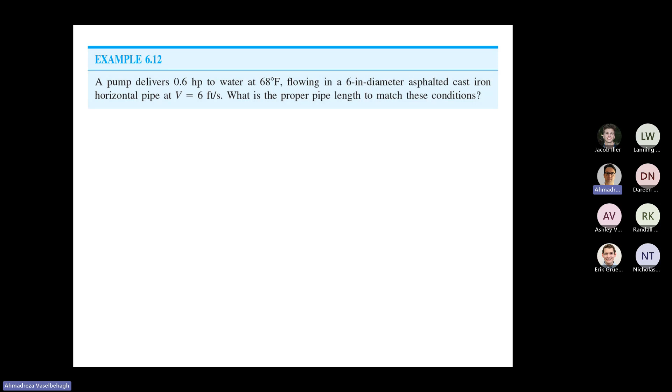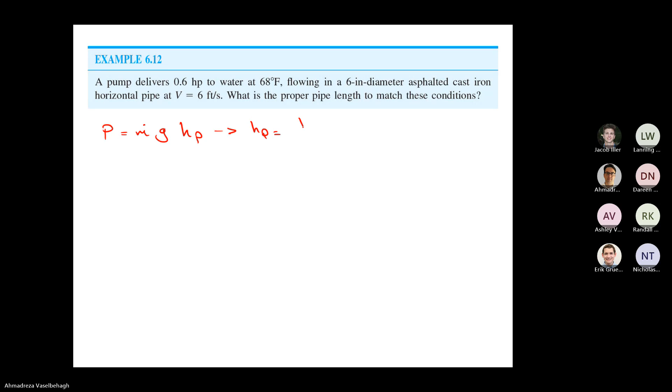So, okay, the first thing I'm going to do, I'm going to write down power P is equal to M dot G and then head of the pump. So from here, we know that head of the pump is going to be power, which is given to us, divided by M dot G. What is M dot? M dot is rho VA, right? So rho VA, and then multiplied by G.

So I'm going to plug in all the values that we have. Head of the pump would be 0.6 horsepower, but then we need to convert this horsepower to foot pound force divided by second. So every horsepower is equal to 550 pound force times foot divided by second.

You know, Newton meter is joules, right? Force times displacement is work. So now instead of Newton, you have pound force, and instead of meter, you have foot. So that's joules. Joules divided by second is watt. So that's why pound force times foot over second is basically power. Okay. So every 550 pound force foot per second is equal to 1 horsepower.

So if I multiply 0.6 horsepower by that 550, then I've basically converted my power to pound force foot over second. So that's the power, and the whole power is divided by rho VA times G. Okay, so rho times G is equal to gamma, right? So then instead of VAG, we could basically say V area gamma.

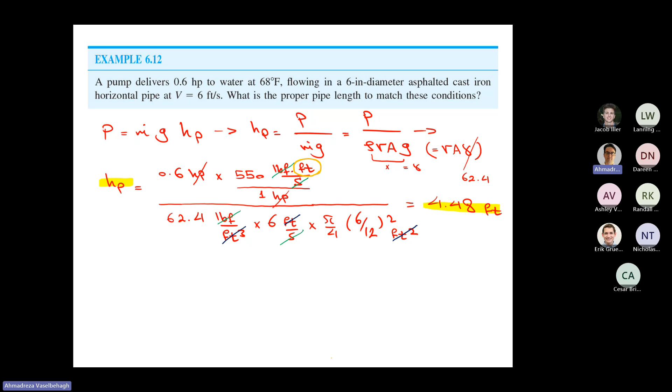So sure. The other thing is the elevation. If the pipe was going up or going down at a certain slope, right, then we needed to have that delta Z. Well, in this case, it's horizontal, so we don't have to worry about that.

So we say HF, basically losses, is going to be equal to head of the pump, which is 4.48, and that is equal to F L over D, V squared over 2G. Okay, and let's not forget you're looking for L. The problem wants us to find the length.

So in this thing, we know what D is. It's 6 inches, we convert that, it's 0.5. We know what G is, in British units, 32.17. We know what velocity is, that is 6. The only two things that we don't know there, one is F, the other one is L. But we know how to find F. So let's go after finding F first, and then we will plug everything in here and find L. So I'm going to go to the next slide and find F there.

So how do we do that? We need to have the Reynolds number, right? So Reynolds number is equal to rho V D over viscosity, right? So now what is that?

Well, or we can write it as VD over viscosity, dynamic viscosity over rho. So you see the rho is always there. It can get combined into mu, right? And that is nu, or kinematic viscosity. So you can go as VD over nu. V, we know what that is. That is 6. D is 0.5 after converting that 6 inches to foot.

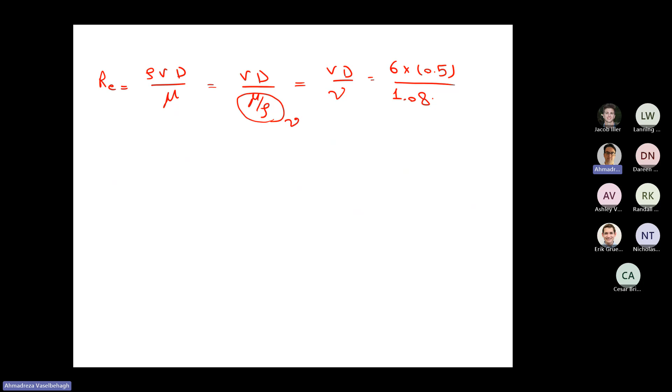And then we have nu of water. Again, all these properties will be given to you either in a table or directly in the problem statement. Obviously, I don't expect you to memorize these. So now let's look at the units. If you look at the units, on the top we have velocity 6, that is foot per second, right? That 0.5 is also foot.

And what's the unit of kinematic viscosity? That's either meters squared per second or foot squared per second. So that is foot squared per second. It's always a good practice to keep track of units so you know you're not messing up anywhere. So you can tell that it's foot squared per second on the top, foot squared per second on the bottom. So this is unitless. And the value, if you calculate that, is 278,500. And obviously it is unitless. So that's your Reynolds number.

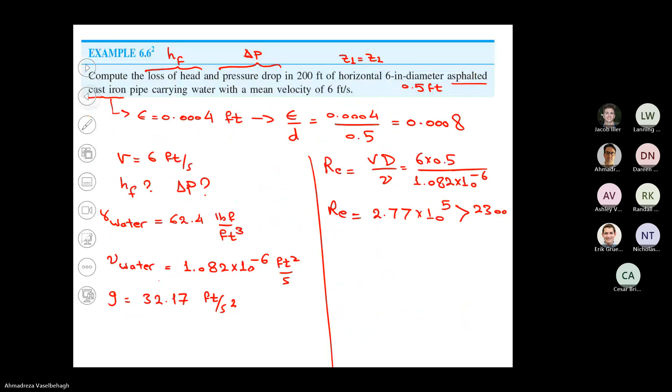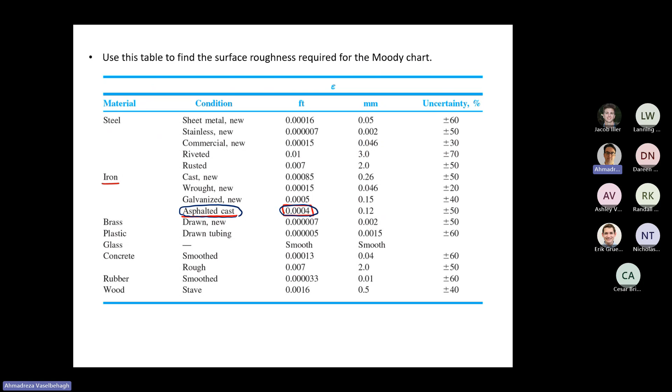And then you can also find your epsilon over D. Well, how do we find epsilon over D? We know what material is used to build this pipe. We go to the table and we read the value of epsilon. So what's the material? It's cast iron asphalt. Let's go back to that table that I provided to you. So it's this, right? The same thing that we had in the other problem. Since we are going with foot, it's 0.0004, and that is in foot, obviously.

So what is D? A common mistake, when you're working on this problem in the heat of the moment, you just forget converting these units. You can easily go ahead and divide that by 6, and then you end up with a completely different value when you go to the Moody chart to read the value of F. So you have to be very careful. You don't divide this by 6, you divide that by 0.5 in foot because 6 is in inches and needs to be converted. So it's 0.0008 then, right? And that is unitless.

So using epsilon over D and Reynolds number, we go to the Moody diagram, and then from there we read the value of F. I'm going to practice that now and see what F we can read there. 278,500. And you know you're not going to be able to spot 278,500 precisely on that diagram because of the resolution that it has. And epsilon over D is 0.0008.

Let's go and find that diagram. Yeah, here. 0.0008 is this. It's good to actually have an epsilon over D that has a line there. Otherwise, you have to read between the lines. So that's your 0.0008 line. Let me mark that so I'm not going to lose this line. Now, what is my Reynolds number? It was

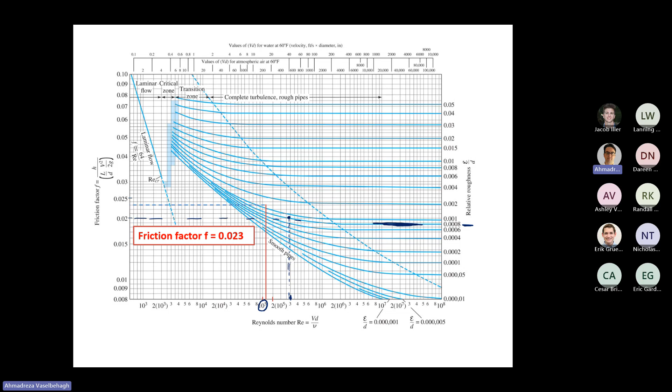So this line over here, let's just see what that is. It's this line. So this is kind of like 0.02. So I'm going to go with F equals 0.02.

0.02. And now I'm going to go back to the previous slide and plug everything in there and find the value of L, which was the length of the pipe. I brought this problem to you because one of you asked me, is it always like that we are after HF? So this is an example that you're not really after HF. You do the very same thing, but you're finding another variable in your equation.

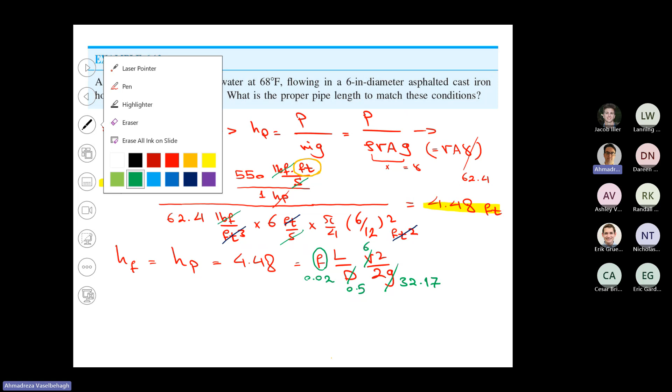So this is 0.02. D is going to be 0.5. G is going to be 32.17. V is 6. Let me redo that. And then from here, you can go ahead and find the value of L. So the value of L is going to be roughly, let me see. So I would say then L is 4.48 times 0.5 times 32.17 divided by 0.02.

And then, oh, and there's a 2 there. Sorry, I forgot 2 before. It's 2G. So there's a 2 before that 32.17. So it's times 2 times 32.17 divided by F, which is 0.02, and then 6 squared. So from here, you can find the value of L. Does that make sense, what I did here?

You know how this can be very complicated, and I'm not going to give you a problem like that because you won't have time to deal with it. It can be very complicated if D is unknown. I could have given you the value of L. I can give you the very same problem, let's say we don't change anything here. So this is going to be roughly 203 foot. That's the length.

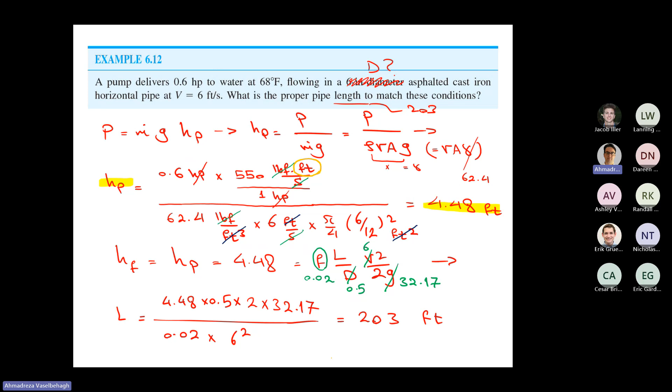Let's say I give you the length. I take D out. And again, I'm not going to give you that. I'm like, what is D? And I tell you that the length is 203 in the problem statement. Now you're in trouble. You know why? Because you can't even find Reynolds number. You don't have D. You see how changing one thing can make this very difficult for you. Not only you don't know what Reynolds number is, you don't even know what epsilon over D is because you don't have D. So you can't use Moody chart.

You see, I'm bringing it up to your attention. I'm not giving you a problem like that. We ran out of time, right? But in an ordinary semester, I would actually give you examples. We would work those examples in the class. You know what you have to do there? How you deal with a problem like that? You guess a solution, you guess a value for F, for example. You guess a value for D. You go through it, and then you have to reiterate.

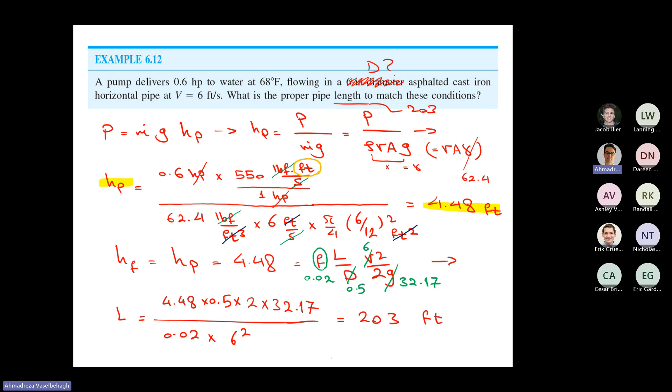It's kind of like, remember that technique that we have in math? If we are solving an equation for X, for example, and we don't know how, you keep one X on one side, you move everything else to the right side, and then you guess a value for X. You put that on the right side and you solve it, and then you get a new value for X. And then you put that new value for X in there. So you have to do something like that if you ever encounter a problem like that.

So for example, let's say I ask you to solve this: X raised to 5 minus 4X squared plus X minus 3 equal to 0. So how are you going to find that? Do you have a way of solving that other than drawing? Let's say you can't plot that. If you don't have any of those things, what would you do? You keep that X on the left side, you move everything to the right, and you end up getting this, right?

And now guess a value for X. X would be 2, for example. And then I'm going to calculate X accordingly, with 2 raised to 5 and so on plus 3, and find a new value for X. And then plug whatever you find there back in here again, find a new value, and go over and over until it converges. Sometimes it does not converge. It actually starts diverging. And then you have to go back to your equation and find another way to define X.

So for example, what you do is you say 4X squared is going to be equal to X raised... I'm going to take a question, Eric, in a second. So 4X squared, and then you keep the other things, X raised to the 5 plus X minus 3, divide both sides by 4, and then take a square root. You see, that's another way of defining it. Then try this. Do the same thing. That's the iterative technique. If D was unknown, you would have to follow this logic. You would have to guess a value for F, go over that loop until it converges.

The reason that I'm sharing this with you is that there is a good chance that you will have to deal with a problem like that if you decide to go into, let's say, HVAC or the business of designing pipe systems. So that's how you deal with it. Okay. Anyway, I'm not going to give you a problem like that. You don't have to worry about this for Thursday. Okay. So with that, Eric, please go ahead and ask your question.

So you were referring specifically to guess and check? I'm referring specifically to what? To guess and check, like, if D is missing, we have to guess and check or something? Yeah, you have to guess your solution, and then you go with whatever you guessed, you find D, and then you calculate Reynolds number with that D. Now you find the value of F. Does that make sense? And you keep repeating this until it converges.

But again, this will not be covered in the exam. I just want to bring it up and tell you that it could be complicated if D was unknown. Okay, you don't have to worry about that this Thursday. So with that, let me ask you this. Any questions about this problem that we worked on and found L?

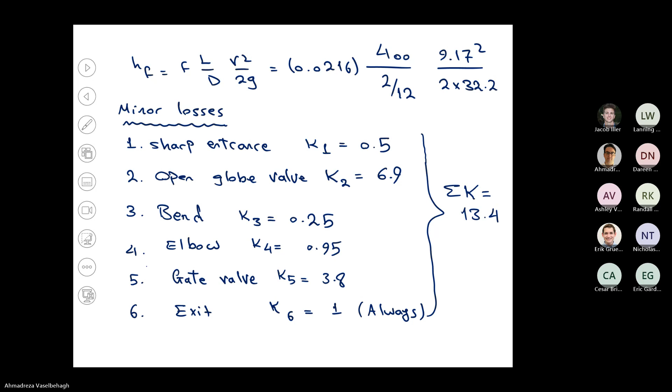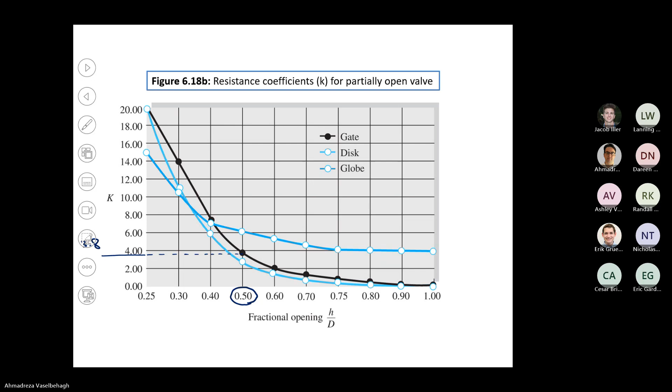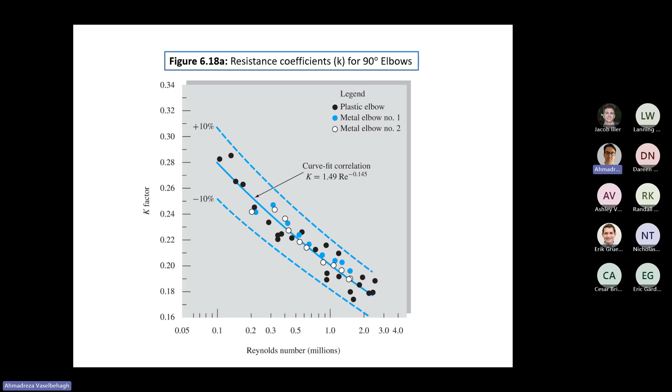That kind of applies as well. So the tables that are supplied to us, there's kind of two for the 90-degree elbow, and one seems like a regression, like a calibrated curve. You're talking about these things, right? There's another one. That one compared to taking the 90-degree elbow from the table, where it tells you the diameter of the pipes. So which one would you use in each situation?

You know what? I would use the table as much as I can, unless you're dealing with a case where, for example, the diameter that you have for a screw is up to 4 inches in the table, and the flange is up to 20 inches, so you have more data for the flange. But let's say it's the screw, and the diameter that you have is 8 inches. Then you can't use this. Then go to that graph. You know what I mean? So use the table as much as you can.

Now that we are at this, let me tell you something else that happened in the homework problem that you're submitting tonight. The elbow was connected to a pipe that has a D of 3 inches, and 3 inches is not even in this table. So you can do two things when you deal with a problem like that. The very first thing you can do is interpolate, and I hope that's what you did. In this case, since 3 is right in the middle of 2 and 4, interpolation is easy, basically averaging your values.

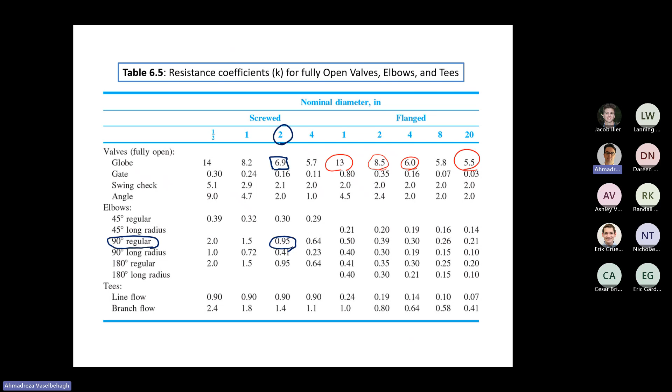Okay. So with that, let's go and look at the first problem that I gave you in that sample exam. One thing about the sample exam that someone brought up this morning was, will the exam cover only the stuff that we have in this sample exam? Well, obviously the answer is no. This is just a sample exam to tell you how complex the exam is going to be, right? And also to show you that it's not going to be anything outside the...

How can I get rid of this thing? Okay. I think now if I go back to this mode, hopefully you won't have it there. Okay. So back again. This? Oh, this thing over there. See? Oh, yes. Thank you. Thank you. Oh, and it actually disappears too.

So it says, write the general form of the continuity equation, and then simplify under the given conditions. It says incompressible in this case. Well, what is the continuity equation? This is a problem from chapter 4, section 4. You always write the general form when they ask you to write the general form. And then when you're simplifying, simplify only for those given conditions. Don't write steady and then simplify for steady.

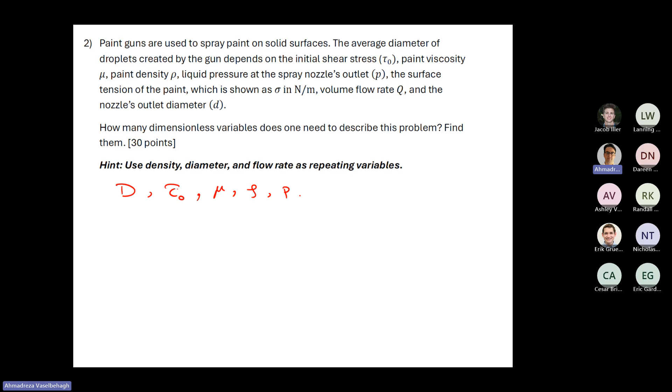And then the surface tension of the paint, which is shown as sigma, in Newton per meter. That's surface tension, right? And then volume flow rate, Q, and the nozzle's outlet diameter, which I'm showing by lowercase d. How many dimensionless variables do we need to describe this? How many dimensionless variables do we need? Is it 7?

I'm counting 8. It's 8 minus 3, 5. Okay, because it says the droplet's diameter is that capital D. And then the last D is the outlet diameter of the nozzle's outlet. Does that make sense? So you have 2 different diameters here. So it says the droplet's diameter depends on these things. So you have to count that first thing, which is the droplet's diameter. Does that make sense? So you have 8 things here. So it goes 1, 2, 3, 4, 5, 6, 7, 8.

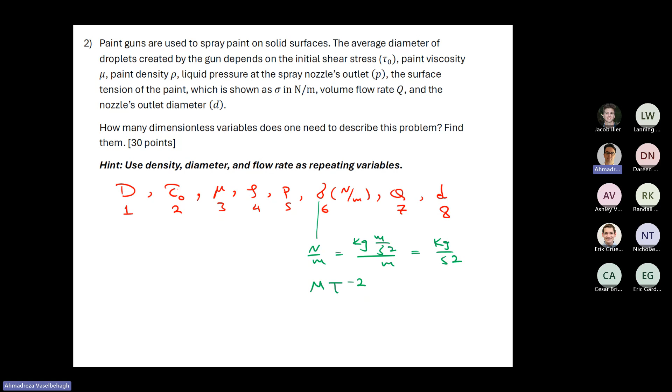Okay. So which of these variables is surface tension? Is that sigma? Yeah. Let me answer your first question first. It says the surface tension, I'm just highlighting the problem statement, which is shown as sigma in Newton per meter. Does that make sense? So sigma in Newton per meter is surface tension. Okay, what was your next question?

Which kind of variables did you say would not be ones that you should use for repeating variables? Yeah. So what I said was, if you choose this diameter and then this diameter, and then choose, for example, density as your repeating variables, it's not going to work. The reason is you don't have time in each of these three. Therefore, when you're grouping these three with any other variable, you don't have time to cancel out time that appears in every other variable.

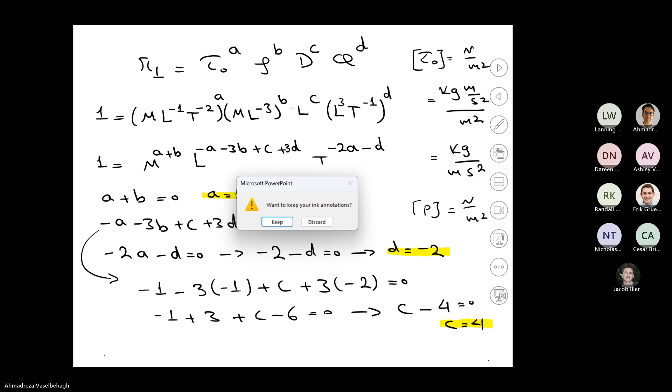Yeah, you know what? Let me just leave the... I don't know how this happened. Where did that come from? This interacting, annotate. How can I just get? Okay, I think it's gone now. Yeah. So let me go back to presentation mode. And okay, so

Now I can write down what I have for pi 1. So pi 1 then is tau raised to a, which is going to be tau naught, rho raised to b, b is -1, and then we have d raised to c, which is d to the 4, this whole thing divided by rho... no, this is good. And then rho, and then we have q raised to d, and d is -2, so it's rho q squared. You see, that is what we guessed by doing what we did early on, and that's exactly what you found.

So now, you said we could actually, now you're after p, the dimensionless variable for pressure. You don't have to repeat all of this. The only thing that you need to do is substitute that tau naught with pressure, and then you have pressure times d raised to 4 over rho q squared. You don't have to repeat that whole thing. So you already have quickly your pi 2. Why do you do that? Because the unit of tau naught is the same as the unit of p.

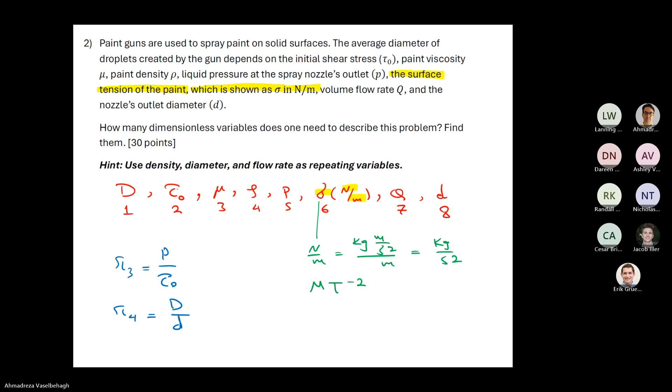Yeah, makes sense. If there's a little d given, we pretty much always assume there's a large D too? Because initially I missed that. Okay, and another question: are you going to give us the repeating variables in the exam because of the amount of time that we have? Or unless it's very similar to one of the problems that we've done before. For example, we worked on a pump problem within the lectures, right?

And in that problem, I told you that go with rho and go with omega, rotational velocity, and also go with a diameter, right? So you already worked that problem. You've already seen that problem. And it was the same variables when we worked on the homework assignment, right? It was again rho, RPM, which is the same as rotational velocity, and then diameter. You know what I'm saying?

If it's something like this, a new problem that you have not worked on before, yes, I'm going to tell you what those repeating variables are. Okay, yes. Have you decided yet if this type of question is going to come with just finding pi, or is it also going to come with applying numbers to it, like what we did with the cylinder in class?

I have not decided that. I haven't written the exam yet. I did not want to do that because then I can't help myself but give you hints about what the problems are going to be. So I don't want to write the exam before this. But I haven't decided that. But look, there are a limited number and type of problems that we've worked.

Oh, and another thing that I told whoever stopped by the office hour today, I know I'm repeating myself, but I think it's important. It's worth repeating. Do not read through the solutions and then assume that you know how to do it. Do it. Because if you read through the solutions, it makes sense to you. You might think that you know how to do it,

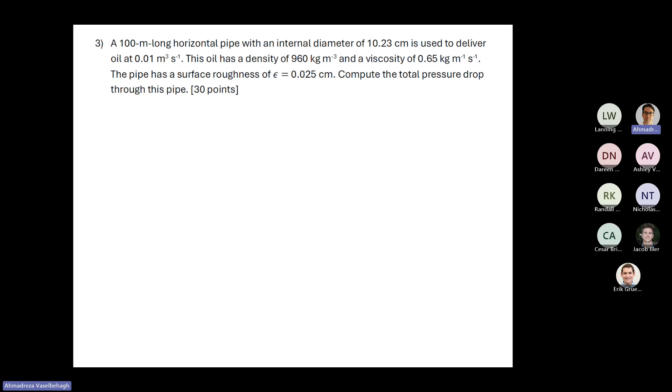Go over those problems one more time. Don't try to expand that data set on your own. Instead of working more problems, work the problems that you have a few more times, if you are thinking about the best way to prepare for this. Okay. So now, let me look at the last problem. The last problem said use the Navier-Stokes equation to formulate flow velocity for Couette flow in the presence of a pressure gradient in the flow direction. Yes.

Eric, do you have a question for me? So what you were suggesting is that students do the actual problem first and then look at the solutions to see where they made mistakes, because if they just read it... It's okay if you read it once, but don't stop there. Do it after you read it. You know what I mean? Do it without looking at my solutions, and make sure you can do it on your own.

Okay. So let me explain problem 4. Problem 4 is directly from the lecture notes, Couette flow. Remember, have I defined Couette flow? It's the last problem that we worked on in section 4. Couette flow is the problem where you have a fixed surface, then some fluid, and then a plate on top of this fluid, and you move that plate with velocity v. That's what Couette flow was.

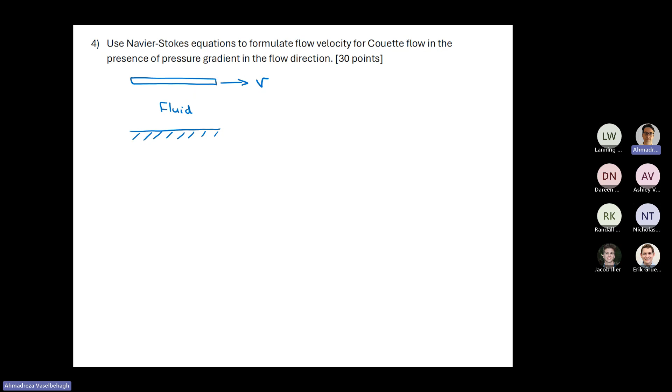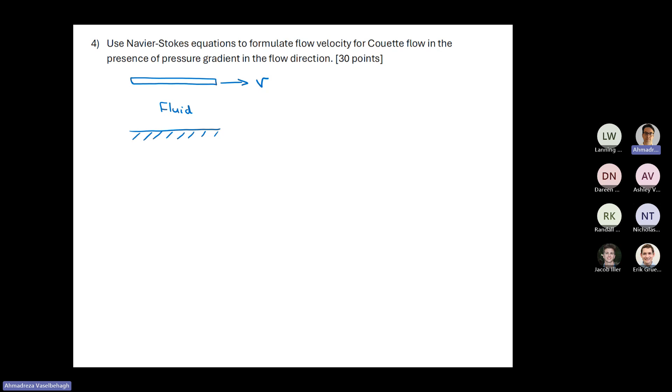Now, when we solve for Couette flow, we solve assuming that we have a pressure gradient or we don't have a pressure gradient. In this problem, it says solve for Couette flow in the presence of a pressure gradient. So this is a problem directly from the lecture notes. So I'm going to go to that problem in the lecture notes and show it to you there, in the interest of time and to make things a little bit easier for us.

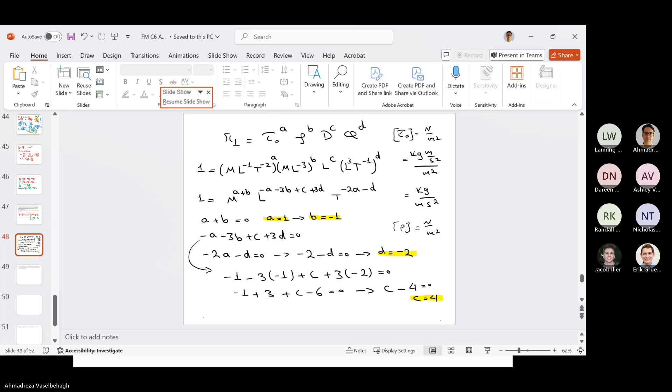This way I can use time a bit more efficiently. So let me go there. Okay, so section 4.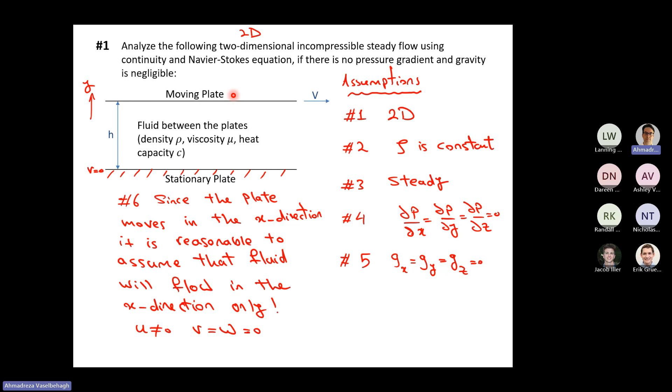And then we plugged in the two boundary conditions that we have. What were the boundary conditions? Velocity at the bottom wall is 0 because it's stationary. Velocity at the top wall is equal to the velocity of the wall. You plug them in there and you find the two. So that's without pressure gradient. And then when I did it with pressure gradient, I kept that term there. Okay, and then when you were integrating, it just ended up being a second degree polynomial instead of a first degree polynomial.

Okay, so this example is important. The reason that I included that in this sample exam was to encourage you to go back and make sure that you read that example and you know how to deal with it. That's the only flow problem that I covered that was solved directly from the Navier-Stokes equation. I give you only one problem, and that's this. So I expect you to know how to work this problem.

So that's problem 4. Any questions about this Couette flow? Look online. Is there anything there that you would like me to explain about this Couette flow? Yes, sir. Specific types of flow cases we would need to know for the exam, like this? Is there a specific name for when both plates are moving or anything like that, or no?

Yes, we can have a problem like that. I won't cover it. But I want you to know everything about this Couette flow. For example, if I ask you to write down the simplifying assumptions that would lead to this solution. If I want to ask a question that's quicker about it, I don't want you to do everything from scratch. I want you to write down the assumptions. Or if I ask you, why can I make this assumption?

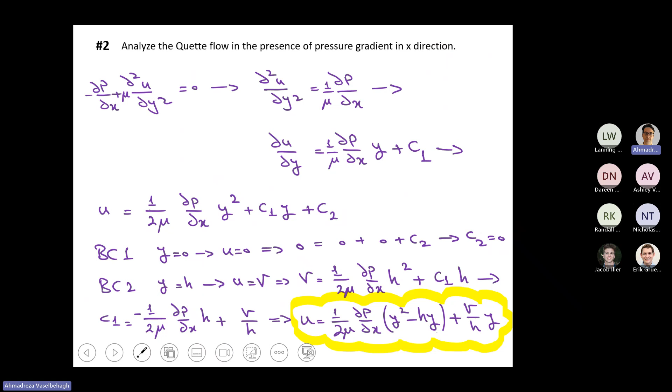In this flow, I'm going to give you this problem statement, for example, and ask you why am I allowed to assume that the second derivative of u with x and the second derivative of u with z are 0? Explain that. See, I want you to be prepared. Then how would you explain that?

You're like, well, because velocity changes only when we move in the y direction, because when I move in the y direction, I get closer to the wall, or my distance from the wall changes. If you move in the x, your distance with the wall doesn't change. The wall is what's slowing the flow down, right? If you're at the same distance from the wall and you're just moving parallel to the wall, your speed is not going to change.

Look at this floor. You can move parallel to the floor in this direction, that's x, or in this direction, that's your z. So you are still at the same distance from the wall. But the moment that you start moving up or down, or you're moving in the y direction, that's when you start having velocity gradient. Okay, so I want you to know this case very well.

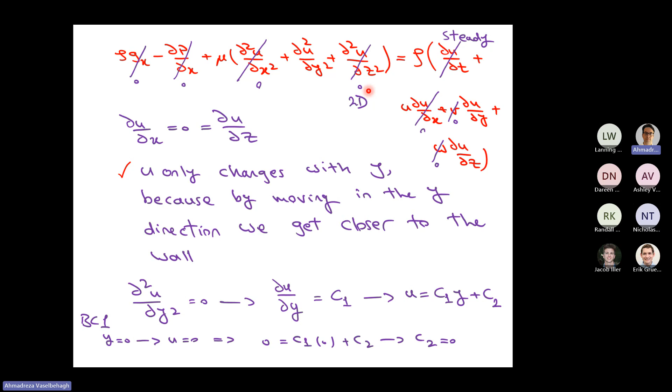Again, in an ordinary semester where we don't lose, how many sessions did we lose? 4 sessions, right? I used to give the example of having 2 cylinders, one inside another, the outer cylinder stationary, the inner cylinder rotating. And then ask you to find the velocity of the flow, because the rotating cylinder would make all the air between the 2 cylinders rotate. And I used to work that in my lecture.

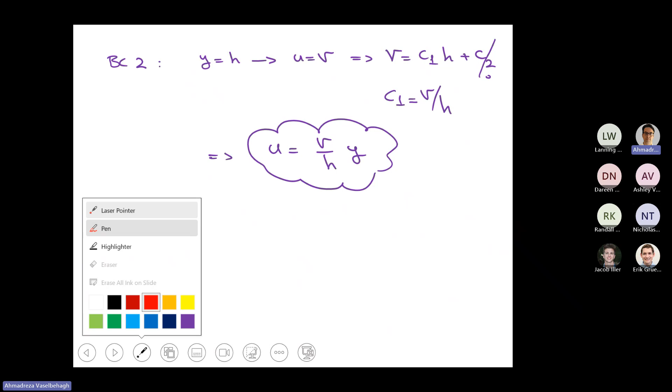I used to work this problem in the lectures. This semester, we skipped it. Again, it's just going to be about this Couette flow. I expect you to know it. So whatever questions I ask about it, you should be able to answer. Yes.

Like the polar version of this equation. Yeah. Because I was thinking, I can't really do that in Cartesian. No, well, it has to be cylindrical or polar. Yeah, which we didn't get into the details of. So the good thing was that everything was covered. We managed to cover everything that you needed to know.

Sometimes I could not cover more complex problems of those concepts. That's what actually happened. There were two things that I could not get into the depth that I really wanted to. One, internal flows. I really wanted to solve a problem where D was unknown and you had to go through that iteration. But I talked about it at least, and you know that that challenge is there. And the other thing is I couldn't cover more specific cases that you could solve for using the Navier-Stokes equations.